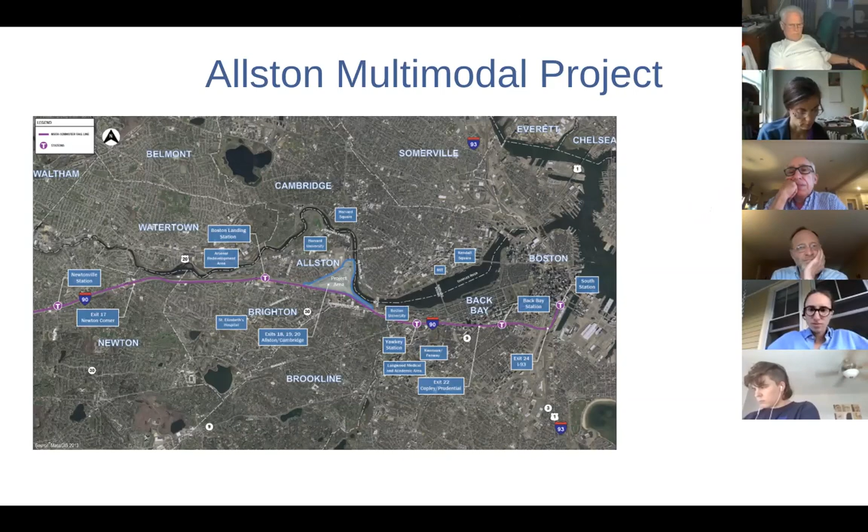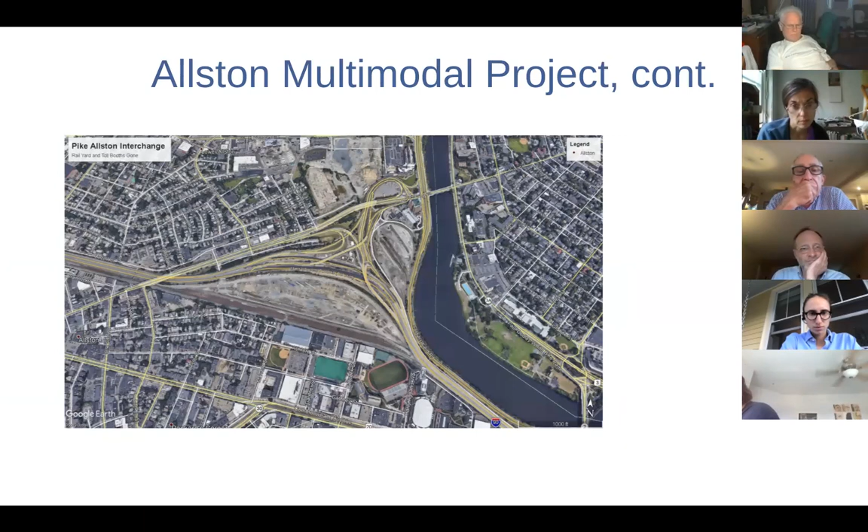That sort of curlicue of exits is the Allston and Cambridge exits. The area right in the middle, that half circle or half almond shape, is old rail yards now and is going to be redeveloped. It's owned by Harvard and will be turned into a new neighborhood once those curlicue of roads are gone - they're going to be straightened out.

All right, we'll get to that. I didn't realize how much of a spaghetti bowl that looks from the air. So Clint, this is you.

Hi, I'm Clint Richmond, co-chair of the Transportation Committee here at the Sierra Club, with John Kuiper, who's also on the phone today and has worked on this issue as well. John, feel free to chime in as well.

Some of you may know I like history, so I wanted to throw in one historical slide to show what this all looked like before the Pike. This is 1938, which would be the peak era of the railroad, and this is before Storrow Drive was built.

I don't know how many of these you've seen, Emily. At the top of the image is Storrow Memorial Embankment, which became Storrow Drive, and then they extended the river out further - I guess you could say it was an incursion back then. Then you have Commonwealth Avenue in the beginning and in the middle, and at the bottom you'll see 1, 2, 3, 4 tracks of rail, which is where the Pike is today.

They only kept two tracks of rail, moved it down, and put the Pike in there. This is actually at Audubon Circle - St. Mary's is Audubon Circle there, you can see on the left. There's BU in the middle.

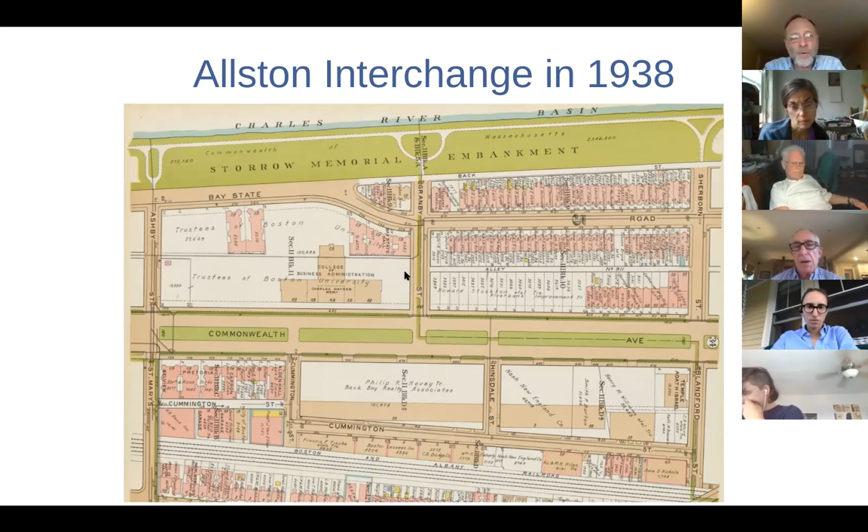Anything more you want to say about this, Clint? Yeah, the point I'd like to make about this slide is that Soldiers Field Road is the extension of Storrow Drive, which was put in in the 50s. Ironically, the Storrow family was against this, but they decided to name it after them.

They waited until Mr. Storrow died, then Mrs. Storrow, then built Storrow Drive when she couldn't fight it anymore. Storrow Drive was actually originally a riding track - you were supposed to take your horses out there. It was meant to be more recreational, and there are no exits between the BU Bridge and River Street at the top of the image.

So those two new roads that are being put in that don't exist today, Cambridge Street South and I think it's called Hotel Way or something—yeah, that's what it is—they're turning those into exits. So the thing is still very auto-centric in my view, that they're taking Storrow Drive and making it more like a highway and adding more exits to it. So they're increasing the importance of it and making it really that much harder to get to the river.

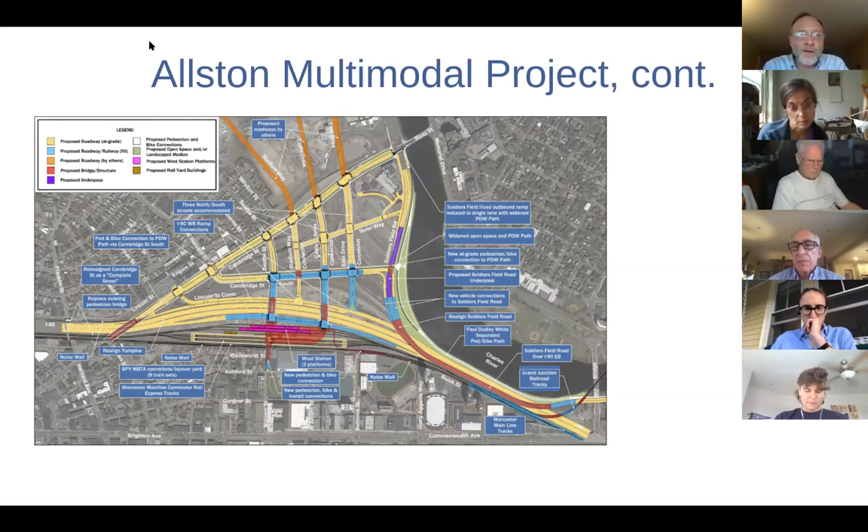So, next slide I guess. This shows how it looks today. And you can see the throat area—you can see pretty clearly how much roadway is squeezed into this area right now. And this is the area that's most challenging in this whole project.

The important thing to note is that the Mass Pike is the elevated section there. And if you look at the top of the image, it's hard to see, but that's where that pretzel interchange is, which was actually the first portion of the pike built coming from the west. They built this, opened it up, then built further, and it was opened up in stages. The rail—you might not see it too well—in the lower right sort of starts at the BU Bridge and goes under the viaduct, is the Grand Junction Railway, which is a freight-only line today and has been proposed as a passenger connection from the west, from Worcester, from Newton to Kendall Square and North Station.

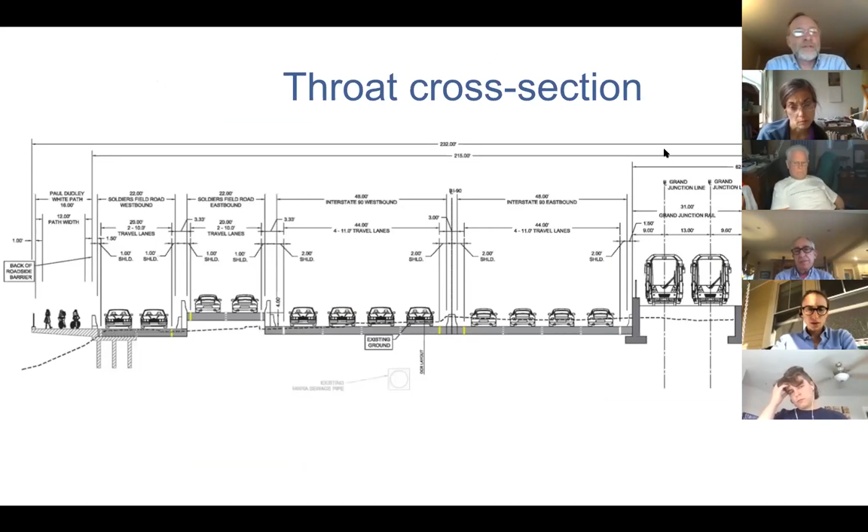Next slide. Yeah, oh this is me. So this is looking at it as a side view here of the throat, and here's all the things that they would have to squeeze in if they put it at grade level.

So you see the two tracks, the two measly tracks of the Worcester line are on the far right. Then there are two tracks for the Grand Junction Railroad, and those lines don't really cross, and I don't think are meant to cross ever, except maybe to move equipment. And then you've got the 8 lanes of the Pike, and notice there's no shoulder there basically. And then you have 4 lanes of Soldiers Field Road, and then the dotted line is the land today. So the Paul Dudley White Path, as it's called today, is that portion—it's still in the river.

So they just sort of ran out of room, and this is where some advocates have started to question why is so much being jammed in there, and what's the distribution between the different modes, right? We're trying to triple track the Worcester line, far cry from its quadruple track of the past, but that triple tracking would end inside Boston, even though you might argue you need it there the most. So no one's talking about adding 3 tracks of the Worcester line, and the Paul Dudley White section, if you can see it there, is actually only 12 feet wide. So that's a mixed use path, and that's really kind of below the minimum requirements for national standards groups like AASHTO for those kinds of modes, right?

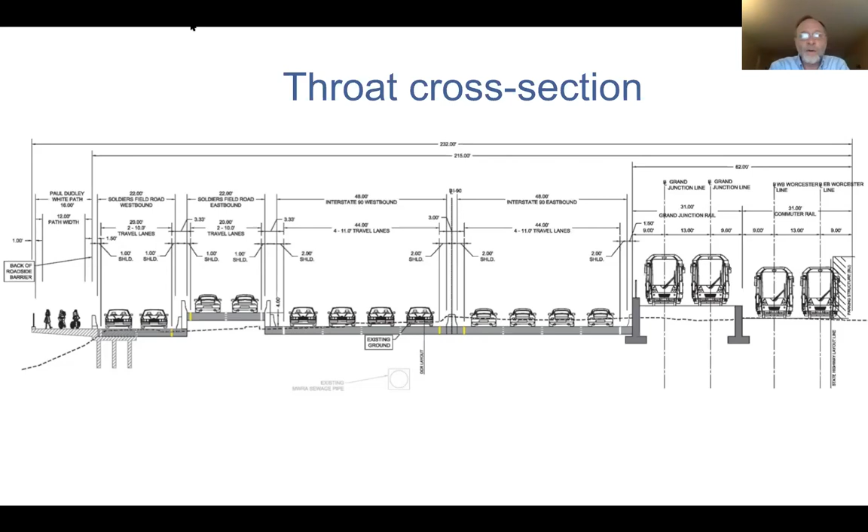So just to give people a timeline of what is going on here: the viaduct, which just means the overpass or elevated part of the highway in Allston, the elevated part of the Mass Pike, needs to be repaired. You just drive on Soldiers Field Road heading west and you can see that it looks like it's crumbling. So it's being repaired every year, it's expensive, it needs to be replaced. To their credit, several years ago MassDOT suggested, I think with prodding from others, let's rebuild this right.

Let's just not rebuild it as is. Let's really be forward thinking and do it in a multimodal way, and really invest in ways to promote walking and cycling and transit. And so a task force was created in 2014.

Charles River Watershed Association is a stakeholder in that task force. It was identified early on that the throat area is the most challenging part of the project.

Speeding ahead, last January, the MassDOT Secretary, Stephanie Pollack, chose what was called the hybrid design, where Soldier Field Road is elevated, the Mass Pike was below that. There was plenty of space created for extra parkland, cycling and pedestrians. It wasn't all squeezed in the way you just saw.

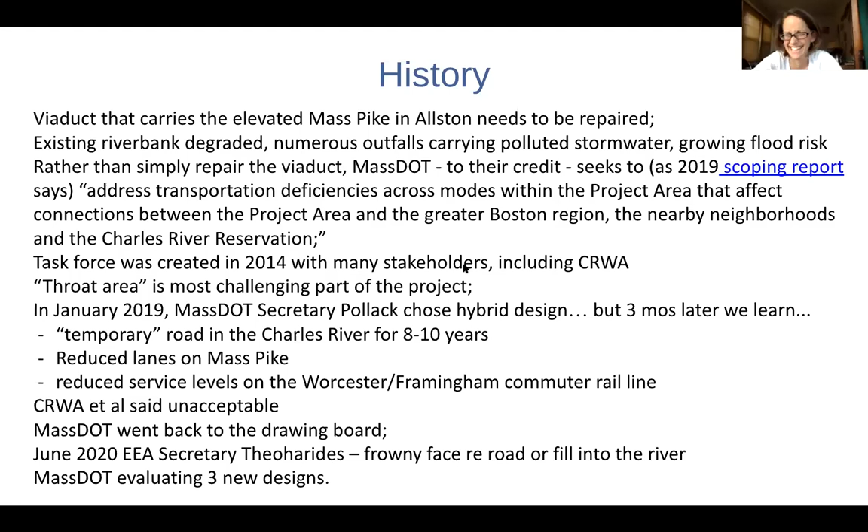And just to be clear, all of these project designs do include many good things that many of us, if not all of us, want, which is that new neighborhood, West Station, the possibility of the Grand Junction, though some of us think that should be more explicit sooner, bicycle and pedestrian connections, and the bike path.

Next slide. Well, hold on. Oh, well, okay. Let me just say one more thing. But this only happens if it gets built. So that's why, if Stephanie Pollack gets angry and is like, forget it, I'll just rebuild it as is, then no one wins. Go ahead.

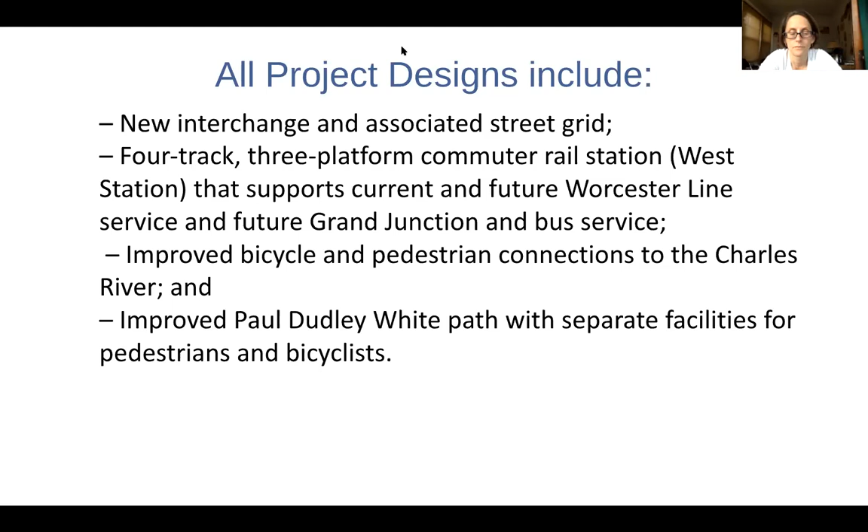Right. But the important thing to note is that these are long-term goals that I think MassDOT has bought into, but they haven't actually committed to future Grand Junction service. This would sort of preserve it and set it up. And West Station, I think, is still officially not anything until 2040 under the MassDOT plans.

I mean, that's just insane to wait 20 years for that station. There's been talk of a temporary station, and Harvard might help build it, or BU might throw in a very small amount. But there's been really a lack of commitment to those other modes. So a lot of groups like CLF, Transit Matters and Livable Streets have been saying this needs to be a transit-first project to really make it a multimodal project.

And soon, like immediately, Transit Matters says let's build regional rail now. Let's electrify the Worcester line. Do it now while there's all this construction and people are going to be open to switching modes, because the Pike's going to be a mess, but you don't want to make the rail a mess at the same time.

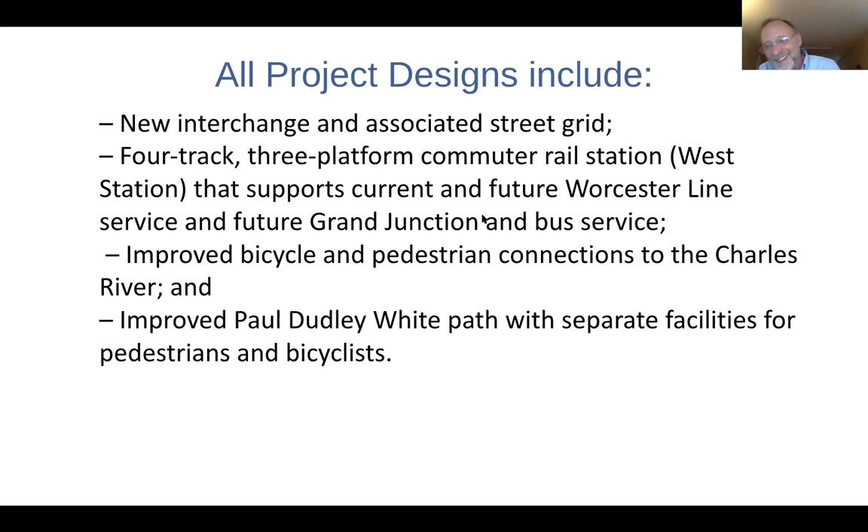I just raised this—folks may have seen there's been a couple op-eds by Robin Chase and Doug Foy in the Boston Globe, really focusing on something that hadn't been talked about in the whole 6 years the task force has been in place, which is to look at Soldiers Field Road and Storrow Drive. As Clint noted, Storrow Drive was never supposed to exist. It was a park, and the people who donated the land, the Storrows, never wanted it—they literally waited until Mrs. Storrow died before creating a road. And even if you're going to have a road, it's a parkway, and a parkway has a very specific definition in Massachusetts. It's supposed to be slower, supposed to offer access to the park, not the mini highway it has turned into.

So this does, in theory, offer an opportunity to think bigger, as Doug and Robin have been advocating for, and actually reduce Soldiers Field Road and Storrow Drive to 2 lanes, add pedestrian crossings and traffic lights, which would also create more space for parks, cycling, and pedestrian access. Next slide.

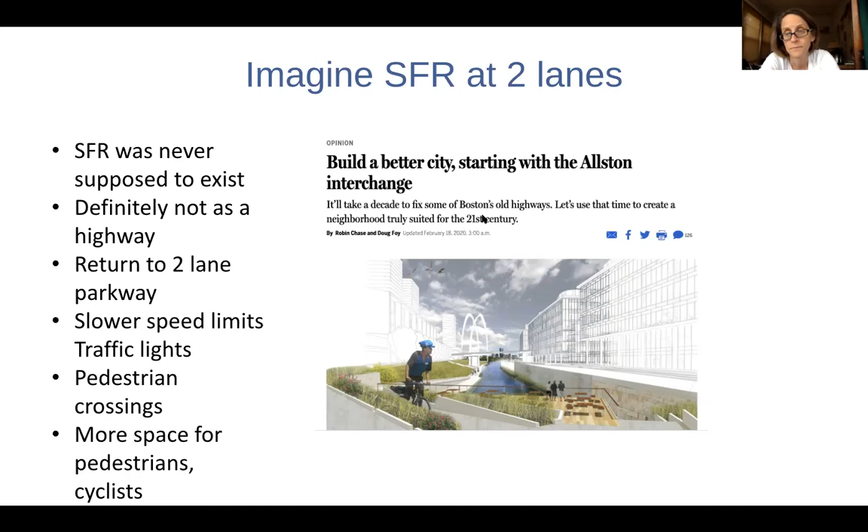So, as I said, from CRWA's perspective, we're good. But if we think about the larger goals we all share in terms of transportation emissions and greenhouse gas emissions—what Clint and I have been talking about, and some of the advocates have been talking about—is to not only do the at-grade version, but to reduce the number of lanes. That might seem extreme, but when you take into account the wider goals already agreed to—Boston has already set a goal, and their document calls it an aspirational goal, but it's still in writing, of reducing the number of car trips in the city by half.

Governor Baker agreed in his State of the Union last year to net zero emissions by 2050. The state Senate has voted, I think more than once, on more ambitious greenhouse gas emissions targets than exist in state law. And MassDOT's GreenDOT initiative, which the Secretary you don't really hear her talking about, has a lot of goals consistent with reducing lanes. And the Governor's Commission on Transportation had numerous recommendations consistent with lane reduction here, prioritizing investment in transit and so forth, getting people out of vehicles basically.

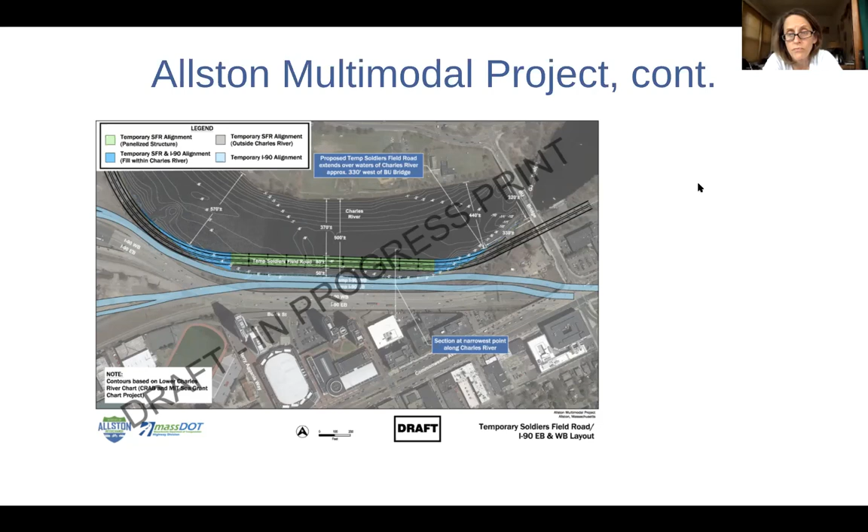From CRWA's perspective, they came out pretty strongly against any option that will cause an intrusion into the river, especially because the riverbank is heavily degraded right now. There are outfalls that carry stormwater and stormwater pollution directly into the river, untreated. So this area is the source of a lot of pollution into the river right now, and that can and should be addressed with this project.

So just to lay out what the issues are right now, there are three options that Secretary Pollack is considering. First, I-90 and Soldiers Field Road at grade, which is the rendering that Clint showed you.

The issue there from CRWA's perspective is the way MassDOT would do it, maintaining all 12 lanes, had one lane of Soldiers Field Road in the river and the bike path in the river. So they would have to fill in the river. She's not going to do that — we know she's not going to do that. That's what that letter from Secretary Theoharides was about, saying you can't really do this.

Second option: I-90, maintaining it on a viaduct. That is very, very unpopular with a lot of folks, particularly those who live in Allston, where the Mass Pike coming through really significantly changed their neighborhood, and not for the better. So this is an opportunity to make things better for them. Keeping the viaduct would not do that.

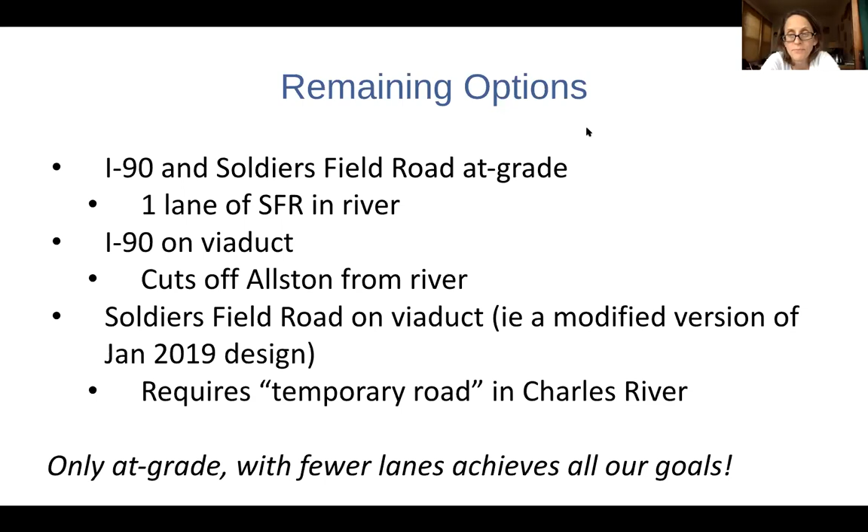But there is one more slide — I know there's one more — okay, which is where we talk more about, and so you haven't seen a lot of the advocates calling for reduced lanes.

When I've been raising this with some, basically they're like, well, yeah, that would be great, but Stephanie Pollack will never go for it, so we're not even going to ask for it. I don't think that's super effective advocacy, frankly.

This slide gets into a little bit of details. The Pike is already 3 lanes west of Newton Corner, so that's not a big change for much of the Pike going west. Traveling east, and in terms of pre-COVID traffic patterns, there wasn't a lot of traffic going westbound in that area at any time. The only time you could justifiably say you need 4 lanes in either direction is going east during the morning rush hour.

So basically what that means is, considering if in theory we could reduce Soldiers Field Road to 2 lanes and the Mass Pike to 6 lanes, you're spending an extra $300 million on a project over $1 billion, for additional capacity that's really about 1,000 people for 90 minutes, Monday through Friday. In theory, one could do things to change behavior during that time so there's no argument for needing that road capacity.

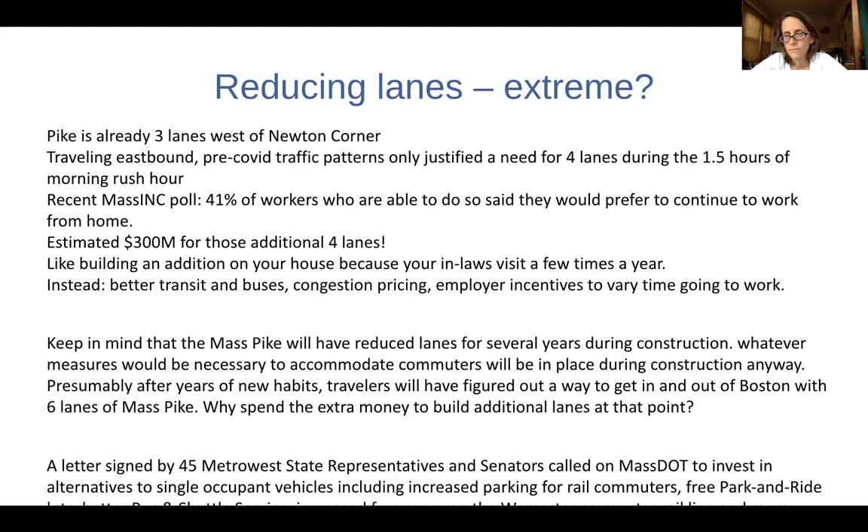Clint, do you have anything to add?

No, not really. I mean, it's kind of a strategy political question in terms of how to proceed here. There's so many stakeholders and so many competing requirements. It's been very challenging - this project's been going for 6 years or more.

To MassDOT's credit, it was originally run out of the highway division, so it was originally seen as 'oh, we're going to rebuild the viaduct,' and then it has morphed into a true multimodal project, but not as far as it needs to go, as I think Emily and I have been hammering you with.